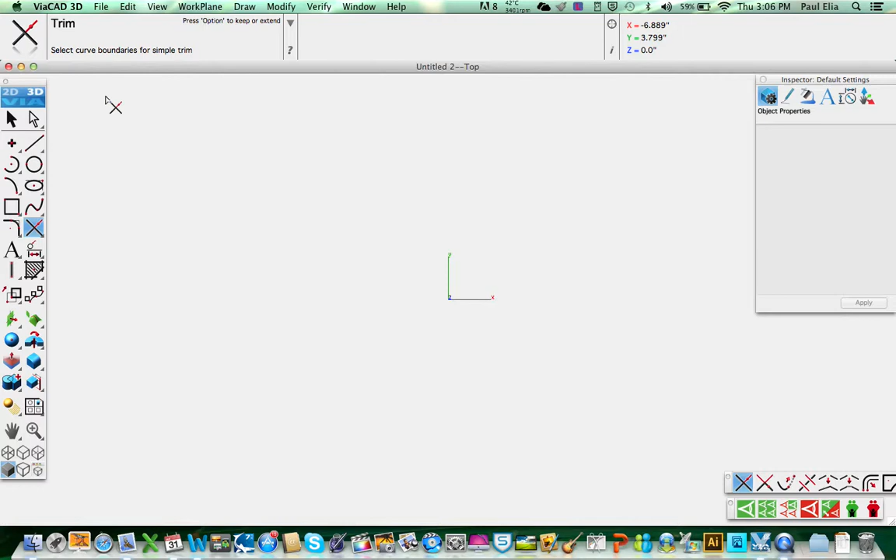Today I'm going to show you how to export a 2D drawing for water jet cutting, laser jet cutting, or hot wire foam cutting.

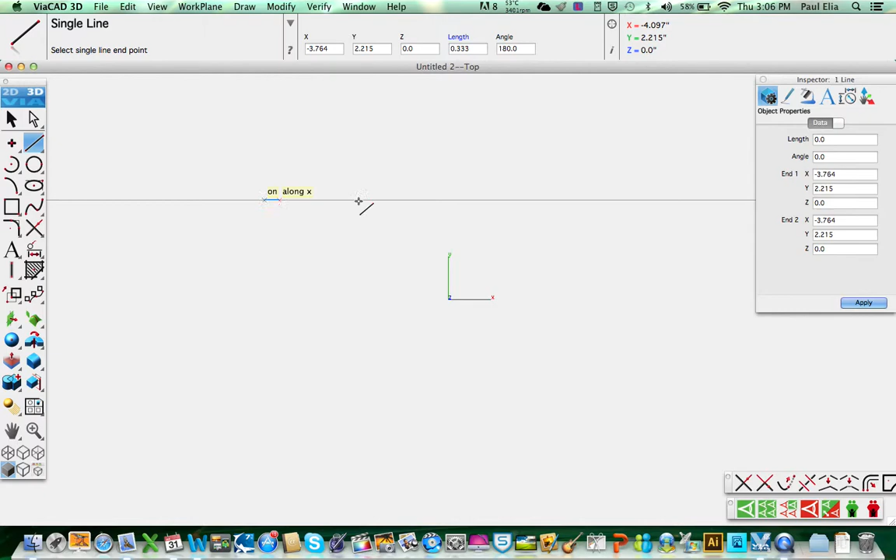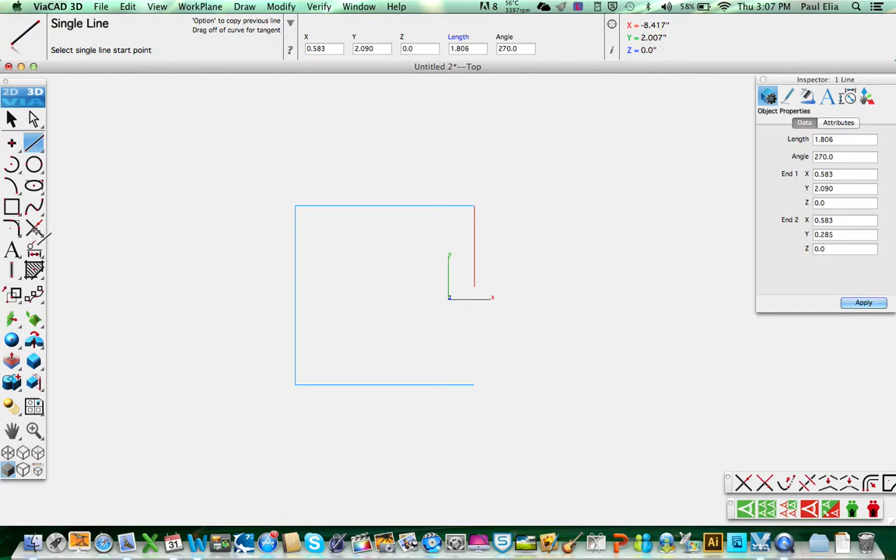So we're going to start off with a dimension of 4 inches. I'm going to make it 4 inches in the box, so 4 inches as well. If you recall, we can do that, or we can just come down, stop there, and click on our second one in, and corner to corner, trim our corners. In this case, we want to make a plexiglass piece with 4 holes.

The 4 holes are going to be 0.4 inches from the corners. So I'll just do that quickly, 0.4. As you see, it pops up along 45 degrees to confirm it. So now we have the four lines that we're going to use to center the holes.

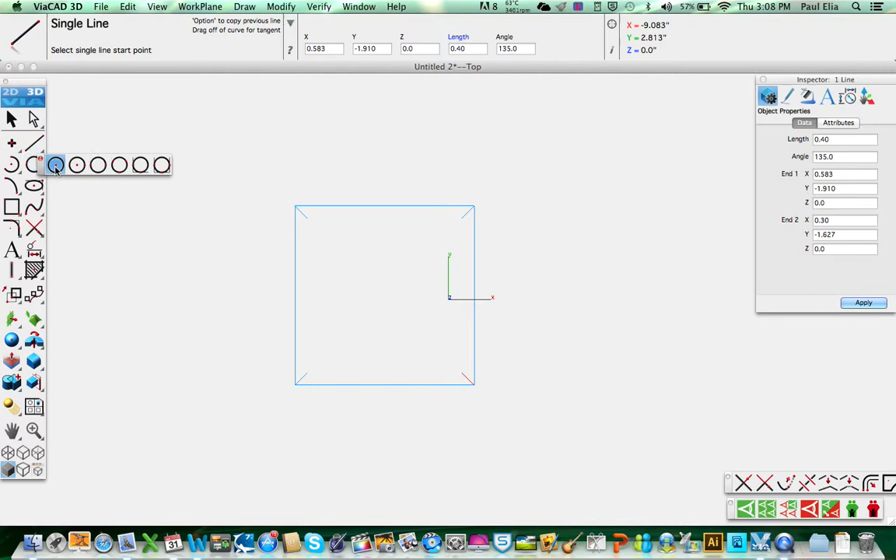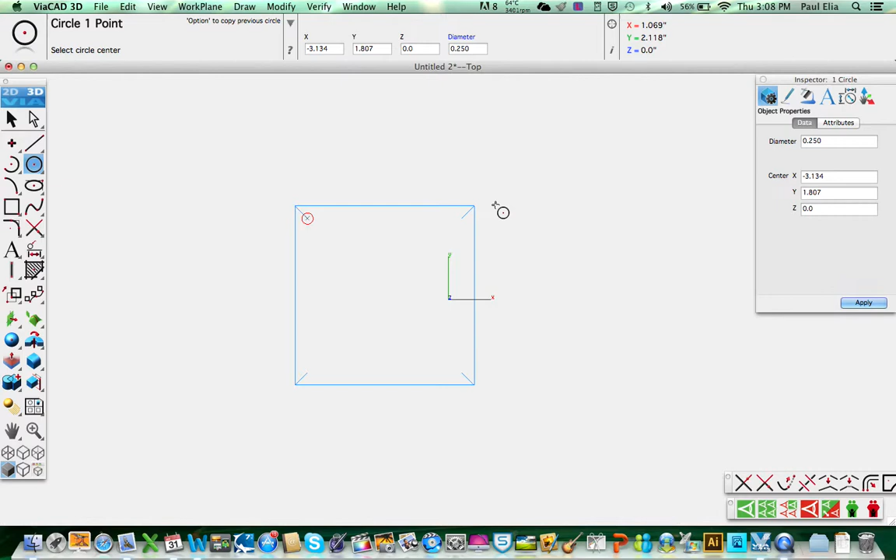So again, we're going to go to the first one, which is circle 1 point, and we're going to hover over here till we hit end point, and we see the diameter is 2 inches. We're going to tab over and make that 0.25, quarter inch. Once we put it in there, the next holes will all be the same, quarter inch.

Now, if I sent this to the laser cutter, they would cut everything they see. So they would cut that line, all these 4 small 0.4 inch lines. The laser cutter would cut it. So I want to get rid of that.

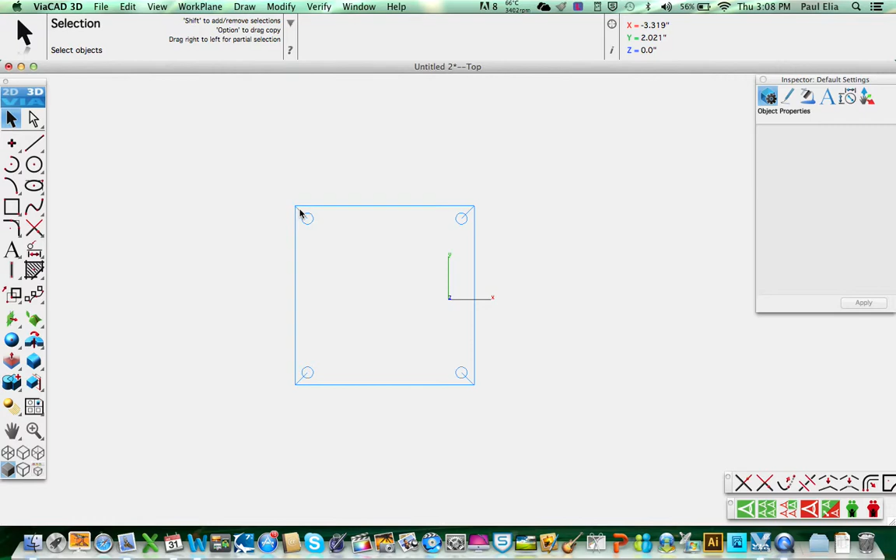So in this case, I've got now something that the laser cutter can see. I want to export it. So I go to export.

In this case, I've got all these different ones. There's Adobe Illustrator, Bitmap, EPS, all these different ones. I can show you at some point what to use them for, but for general purposes, we use 2: one is DWG and one is DXF. But for this case, we'll use this.

What you're going to do is export it. Some software I found does not like one of these 2, so different software likes them differently. So what you want to do is simply export, click OK, and the title will come up. That'll be a DXF, so it could be Project 1 DXF, and you save it to your file.

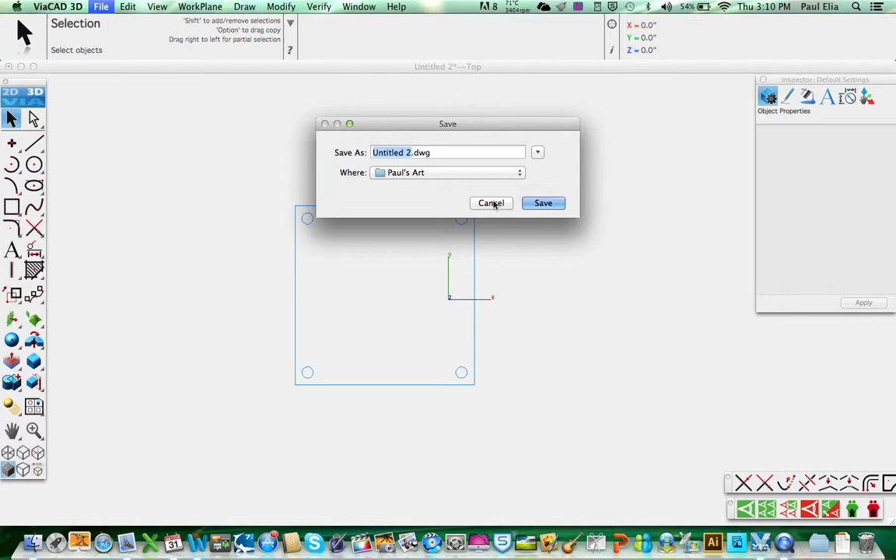We could do it again, do it a different way, and do DWG. So what I do is I always send 2 files to the people cutting my plexi, just so that they have it in place. So there we go. That's how you prepare a drawing for laser cutting.